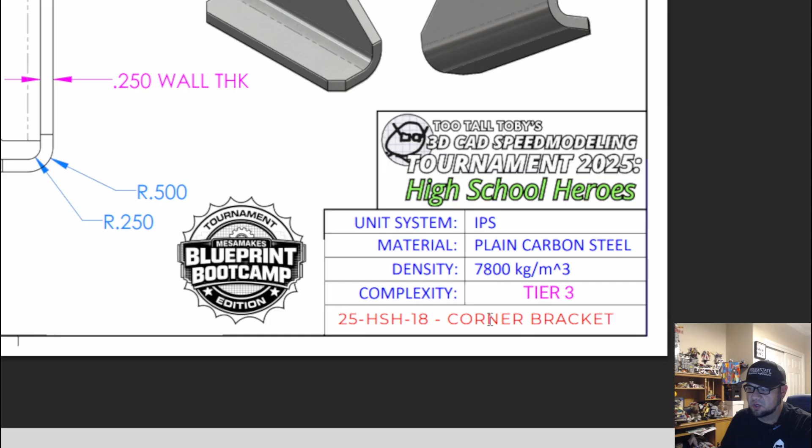So if we take a look here, here is our drawing that we will be doing today. Our units are going to be inches, pounds, and seconds. It is a corner bracket like we've had before, but this time it is going to be a sheet metal bracket. You can draw this whole thing without using a sheet metal function. So if you're doing this in maybe Tinkercad or some other type of 3D CAD system that doesn't have a sheet metal function, it's still possible. You just have to know how to do some stuff. So we'll talk about a little bit of that today.

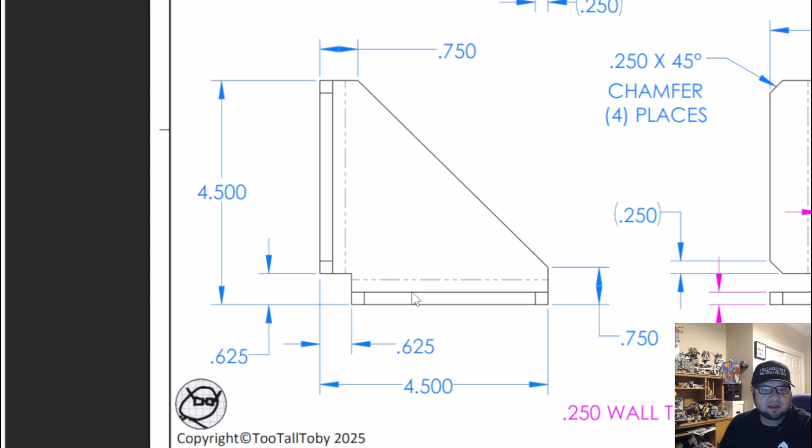But basically, this is the general shape, 4.5 by 4.5, and we're going to come up and over. We've got to cut out a 0.625 by 0.625 square out of the corner for a relief, so when we have those bends they don't interfere. Our thickness is going to be 0.25 or 1/4 inch all the way around, and we have these little legs come off our flanges at 1.25.

So I'm going to walk you through how to do this. And it's going to be a little slower than most of our drawings because I am going to be introducing that sheet metal piece. Like it says, today: what is the mass of this part in x.xxx pounds with a tolerance of 0.001 pound? So let's switch over to our drawing and we will get started.

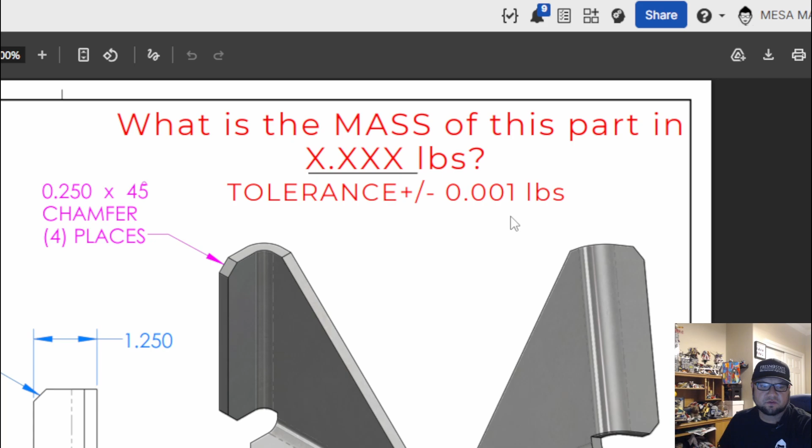All right, once we are in Onshape, the first thing we're going to want to do is start a sketch. So we'll start on that front plane, doing Shift and S to start our sketch and normalize, and P to hide our planes. And this time we're going to start with a little bit of a cutout. So I'm going to use the corner rectangle by pressing the letter G. I'm going to select my origin and I'm going to press the letter Q. Go ahead and zoom in so you can see that a little bit better.

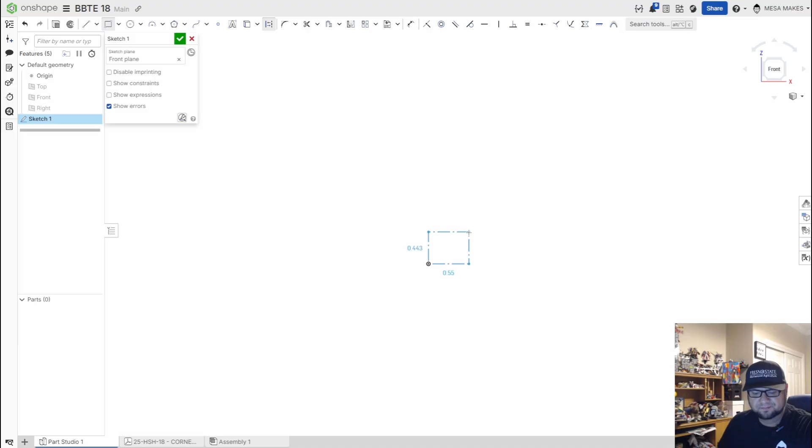And this time I'm going to do 0.625, enter 0.625. And the reason we press that letter Q is because this is a construction line. So we're just helping ourselves out. Next thing, because again we're doing this for speed, I want to do this with just a line instead of using a rectangle, because I'm going to be able to do my dimensions as I go. So I'm going to start here, go over.

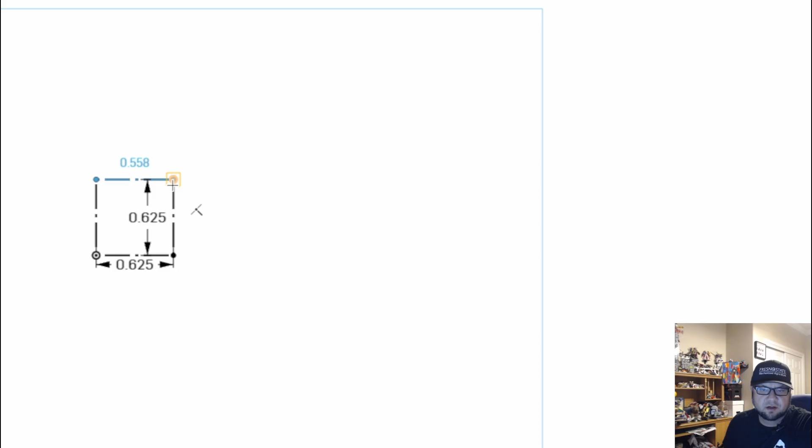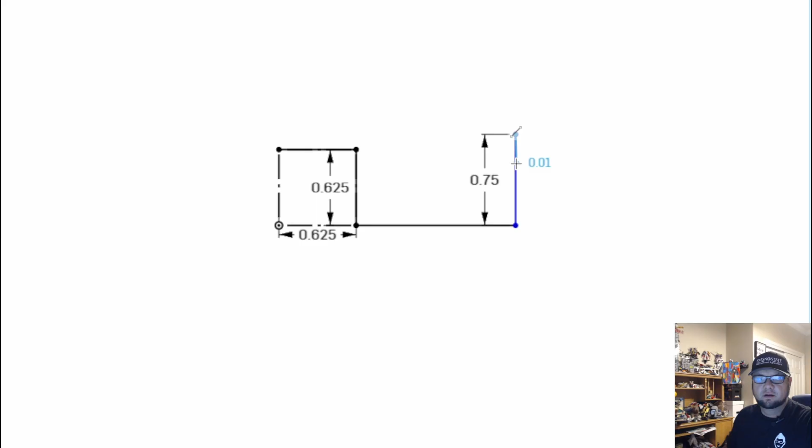I'm going to do that real quick. So I'm going to shut off my construction lines. We'll do letter L. We'll draw a line over, draw a line down. We'll draw a line over. We'll go up 0.75. I'm going to go over here. We'll line up with this end like so,

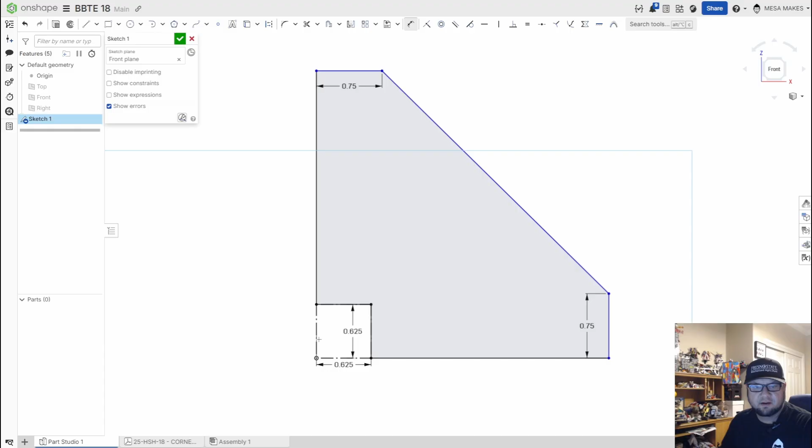0.75. Then I'm going to come back down here and select both of these lines and say equal. It's going to help us out a little bit. We'll zoom back out. And we have our general shape. And now all I have to do is go from my origin to my end and say 4.5, and I get my overall shape.

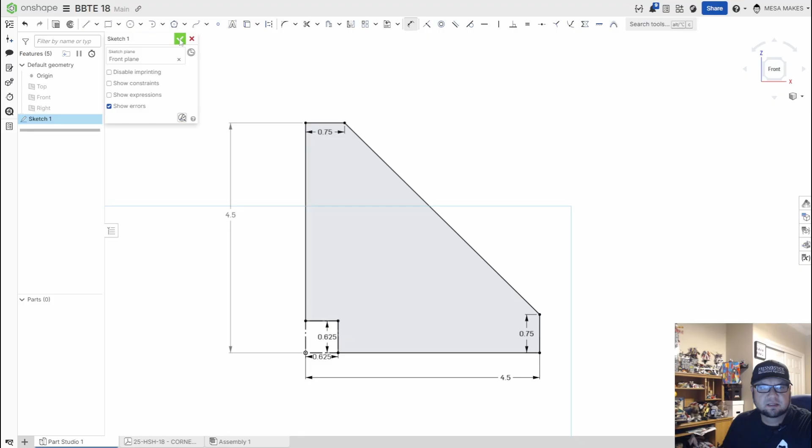So I can check one more time from my origin to here, and we already have that. And notice it is a driven dimension while we have our driving down here. So that's the shape I need to draw. I could have done it with a rectangle and then cut the corner, but this was a little easier for me to visualize and draw. So we're going to go ahead and accept the sketch by clicking the green check mark.

And now we're going to follow up here to the top. We are going to do this using the sheet metal model. So you'll have this drop down next to your search tools, your custom features, and then you have your model tools, your sheet metal model. So we're going to start by making it a sheet metal model. We come over here, we get this, and you have convert, extrude, and thicken.

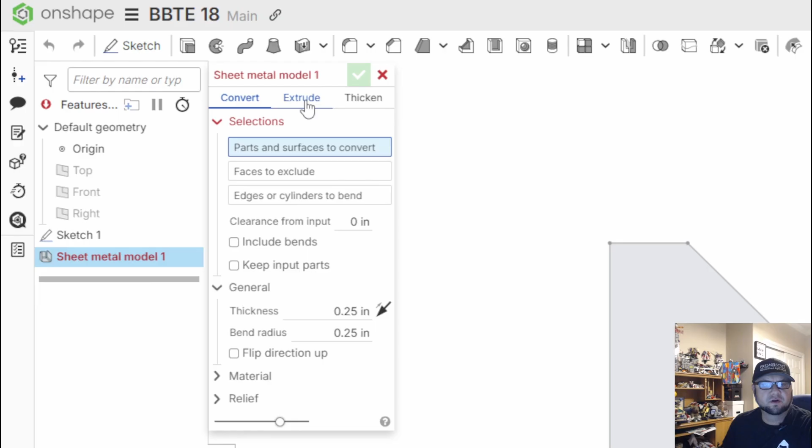Convert takes 3D parts that you already have and turns them into sheet metal models. Extrude is going to take a single line and do that, while thicken is going to take our sketch and make it 3D.

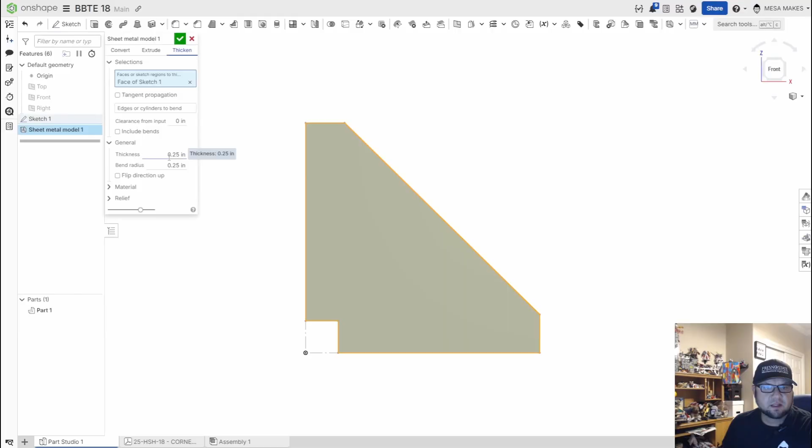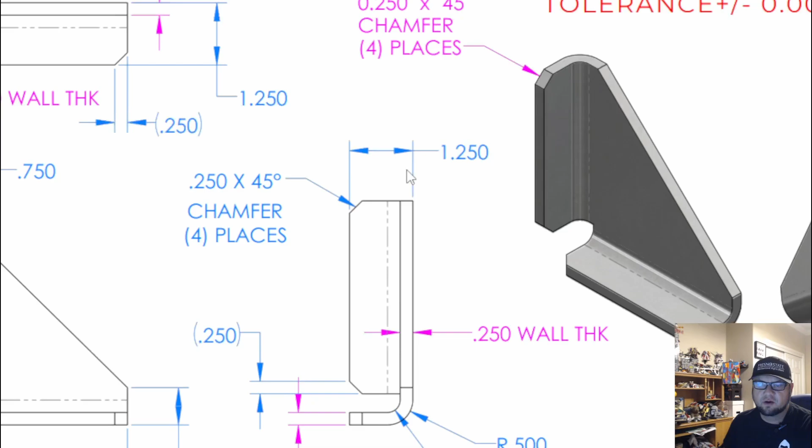So if we look here, we need our thickness on our metal to be 0.25, which I already have in there, and our bend radius needs to match, because if we look back over here, I'm going to jump into our drawing again, you'll see that we have 0.25 of a radius on the inside, and then our outside radius is 0.5. So if you did that simple math, it's going to be 0.25 as our bend radius, which gives us that 0.25 wall thickness all the way through. So if we jump back over into here, we have 0.25, 0.25, and we're going to say accept.

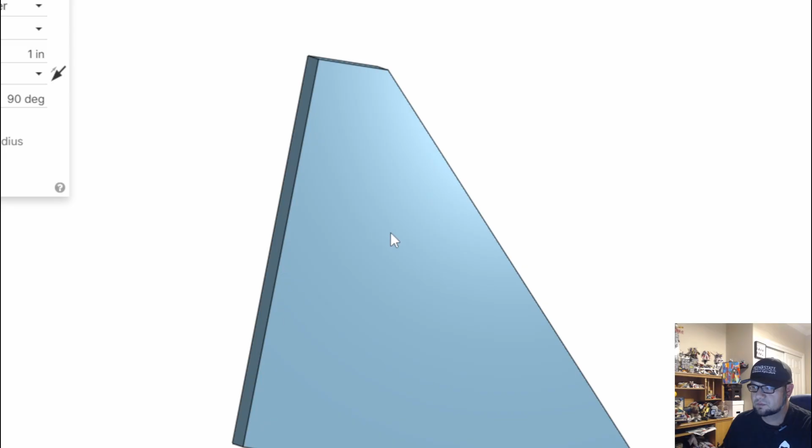And now we have a 3D part, but we need to add those flanges. So our next step is we're going to go again up here to the sheet metal model. We're going to click flange, and we'll get this menu. And this time it's asking us edges or side faces to flange. So the way that works is you kind of zoom in and you pick your edge. So I'm going to pick this bottom corner right here, and I'm going to look at this from the front,

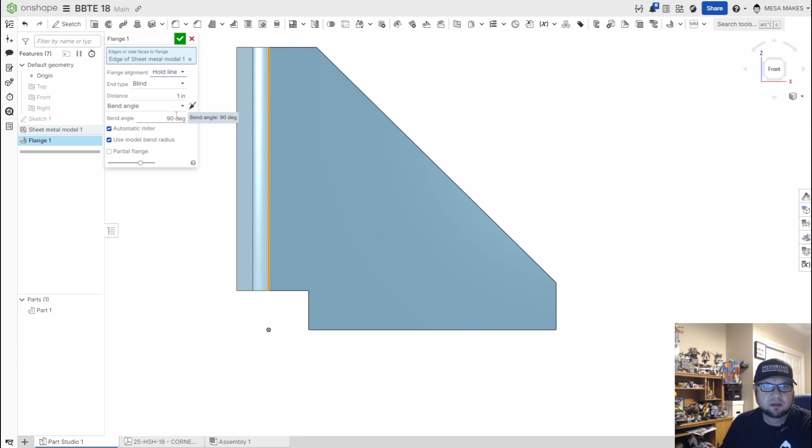and you'll see that when we originally drew this drawing, that line was our outermost. So I got to play with this flange alignment, and if I go inner, it's going to put that line inside of the flange. Outer is going to make that the outside. If we look middle, it's going to center it, and hold line is going to put the bend to the outside of that, which is going to be way bigger than we need. So what we need is outer, to where that line is the outermost part of our flange,

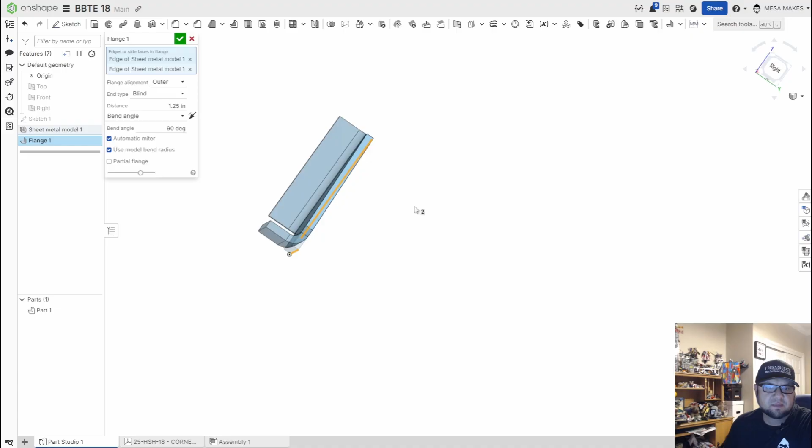and our distance needs to be 1.25. Now the benefit of doing this in the sheet metal view is if I click back up here, I can actually do both flanges at the same time, because they are the same thickness, same depth. If one was a different thickness, then I would have to do a separate flange, but because they're the same thickness, this is kind of cool. We can do them both at the same time. So we're going to say okay, and we have our overall shape.

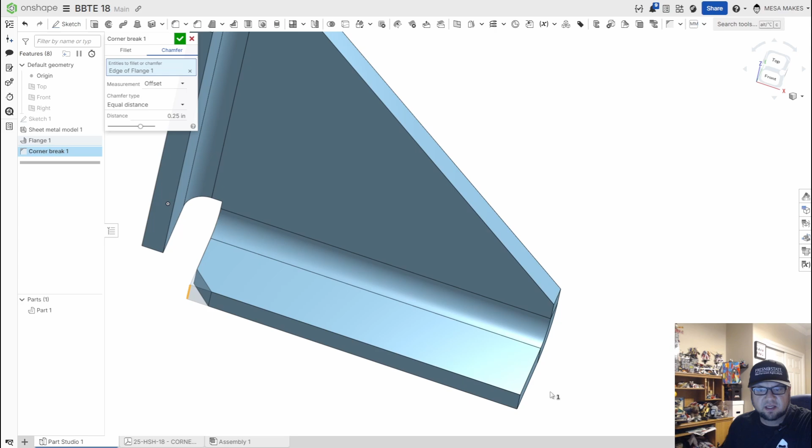Now our next step is we need to add these chamfers. We need to cut these corners. Now you can use this chamfer tool. However, in the sheet metal model, there is corner break, and with corner break you have fillet or chamfer. And what's really cool is you can real quick select each one of these like so, and you don't really have to move a whole lot, and you can get a lot going in one specific view.

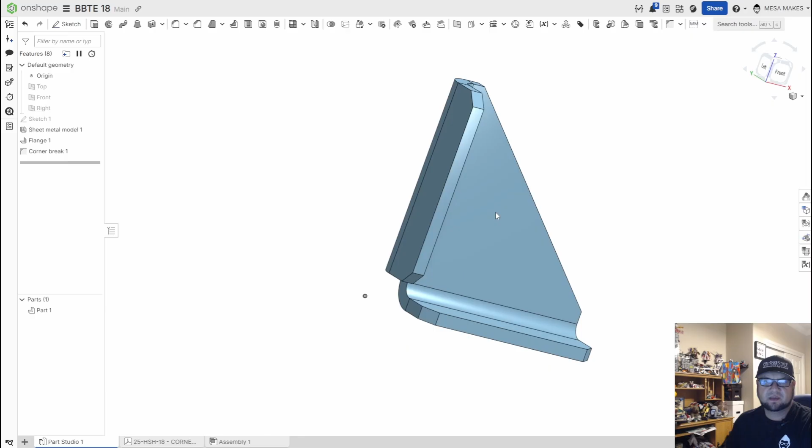So I got all four corners, and if we wanted to do equal distance, two distances, or distance and angle, we'll do distance and angle because that's what it tells us on the drawing. A distance of 0.25 and our angle of 45 degrees. We'll say okay, and we get our shape. So I'm going to right click, assign material, come down here, custom materials. We need to be plain carbon steel.

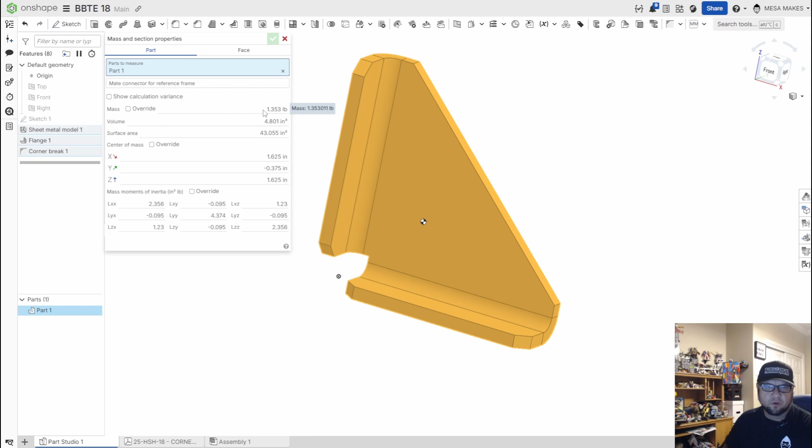We'll say okay. And if I jump on into my weight, I get a mass of 1.353 pounds, which is correct, with a tolerance of plus or minus 0.001. So you can have anywhere from 1.352 all the way up to 1.354 pounds, and that is acceptable. So that's going to be that sketch right there.

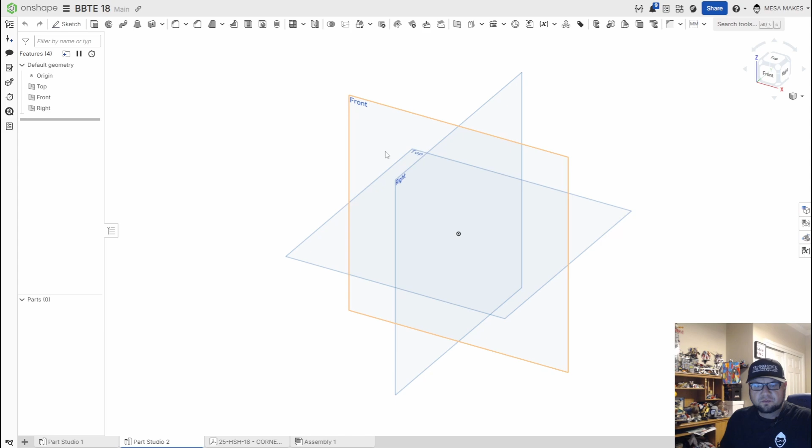Now, I want to show you also how you can do this without using the sheet metal view, because maybe you're still just trying to learn the basics. So I'm going to start a whole new part studio, create a part studio, and we will do this again without any sheet metal tools, the way I kind of learned to start. So we can still start on that front view, shift and S to normalize, P to hide those planes.

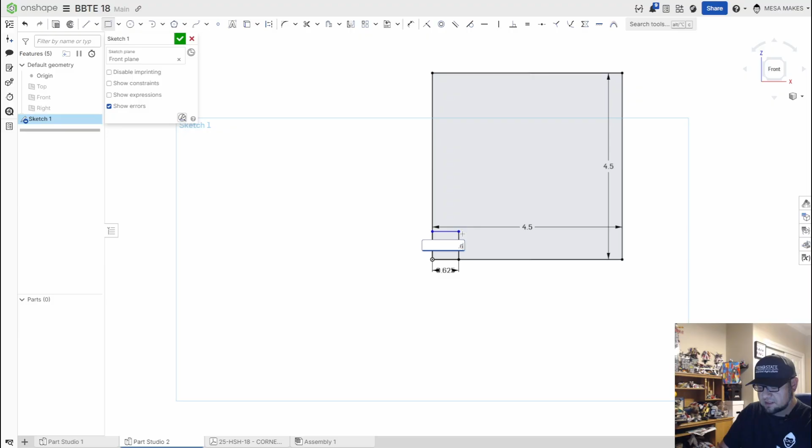And the way I traditionally did this was I started with a rectangle, corner rectangle, and I went 4.5 by 4.5. Then I came in with another one, 0.625 by 0.625 in that corner. I was then able to come and trim that out. I took a line, drew it across, trimmed those out.

And to save myself time, I'm going to select both these lines and say they need to equal one another. So I only have to dimension one of them to 0.75, and it will pull in. Now, just to prove it, we have 0.75 up there as well, and we are good to go. So there's our overall shape. Okay.

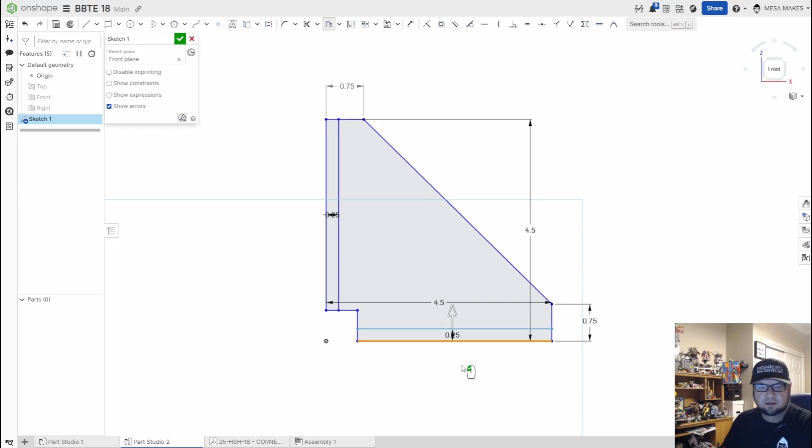Now what we're going to need to do is we're going to offset this line by 0.25, and luckily that's our default. I'm going to offset this by 0.25, and now I can extrude. So what I'm going to do is our thickness needs to be 0.25, so I'll say 0.25, enter, but this time I want it underneath my shape. We'll say accept, turn my sketch back on.

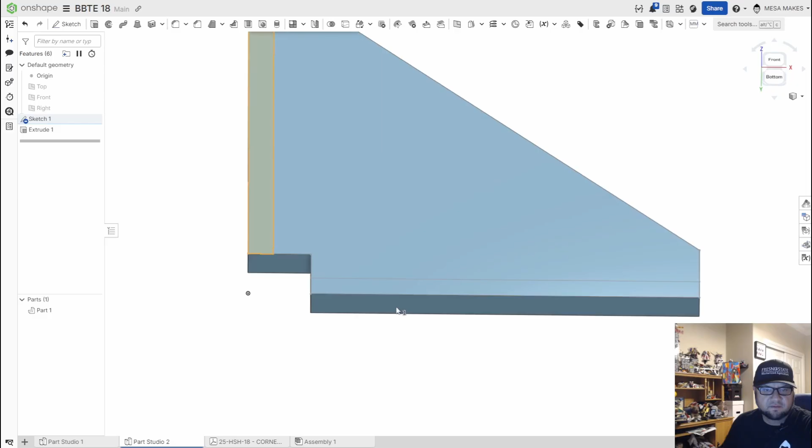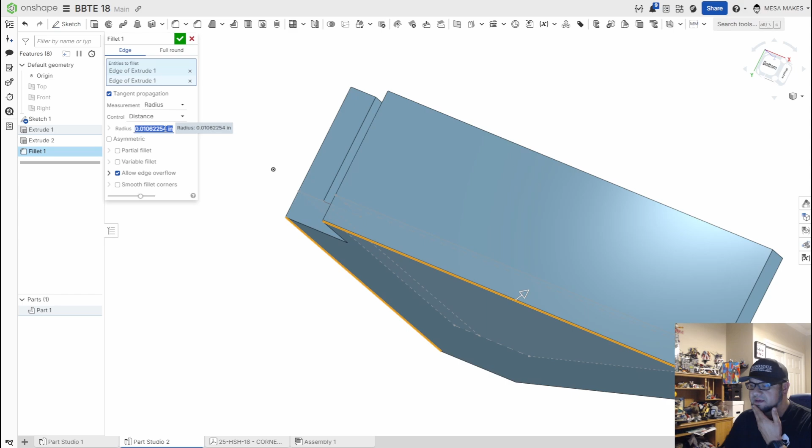I'm going to select both of these pieces, extrude that up, and overall it needs to be 1.25, so we can leave that as 1. And now I have my shape here. Next thing I need to do is round my corners. So if I'm going to do a fillet, I'm going to click here and here, and that radius needs to be 0.5 on the outside.

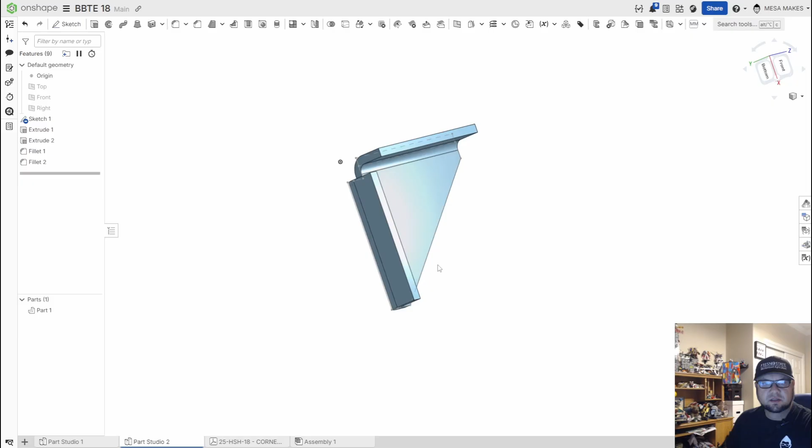And I do it again on the inside, not that one, on the inside, and that one needs to be 0.25. We'll say okay. So now I have my piece done like so. Last but not least, we need to do our chamfer. So I could come over, and again, I'm going to chamfer that corner. Move this a little bit, there we go. That corner, and that corner. And that needs to be 0.25, 45 degrees.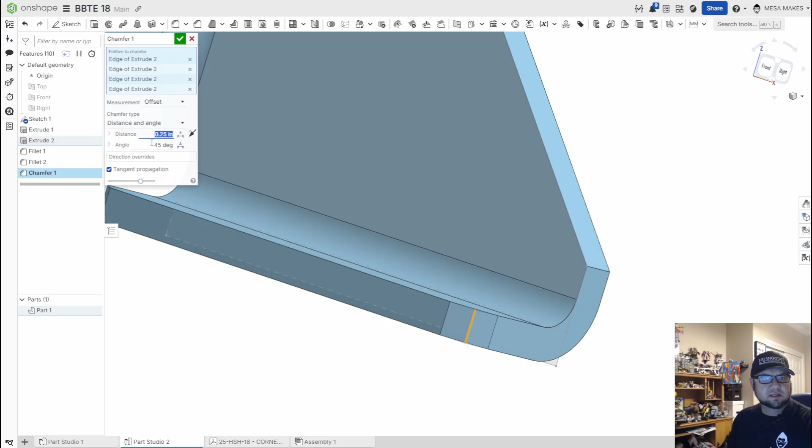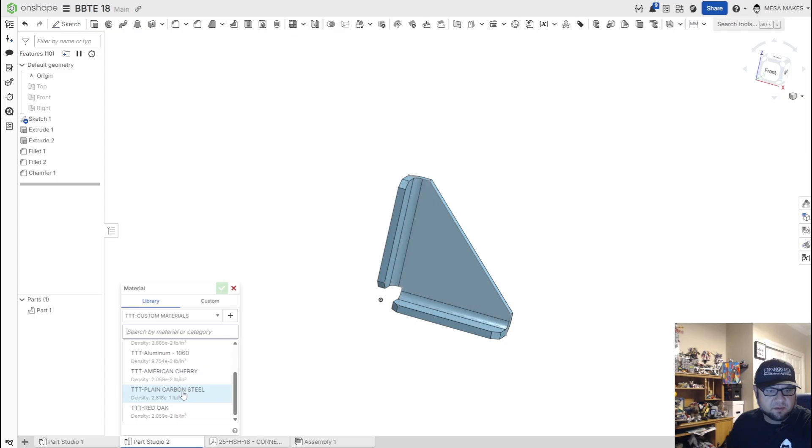We'll say okay, and we have our piece. So we are still the same. We'll check our mass. I'm going to apply, select, apply. Come on. There we go. Assign material. Our material needs to be the plain carbon steel. Say okay, and we'll measure our part. And again, I get 1.353, which is the same answer.

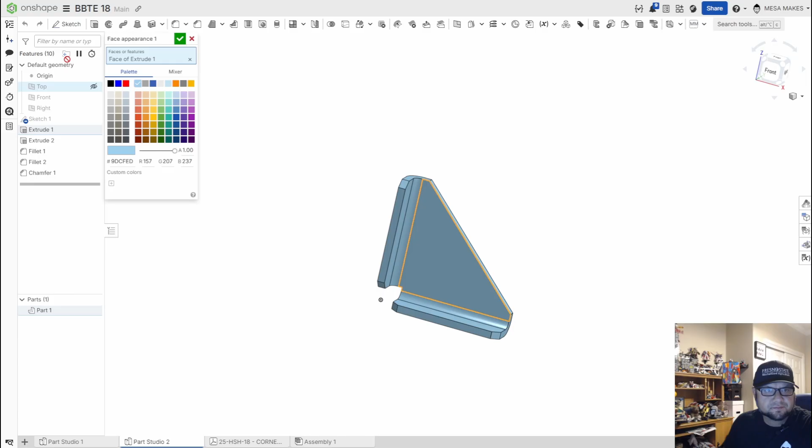So another cool thing you can do is if you bring both over into assemblies. Actually, let me change this one really quick. Change the color. Let's make this thing, not appearance, add the whole appearance. Let's make this one like an orange color. Come into assembly. I can insert both part 1 from Part Studio 1,

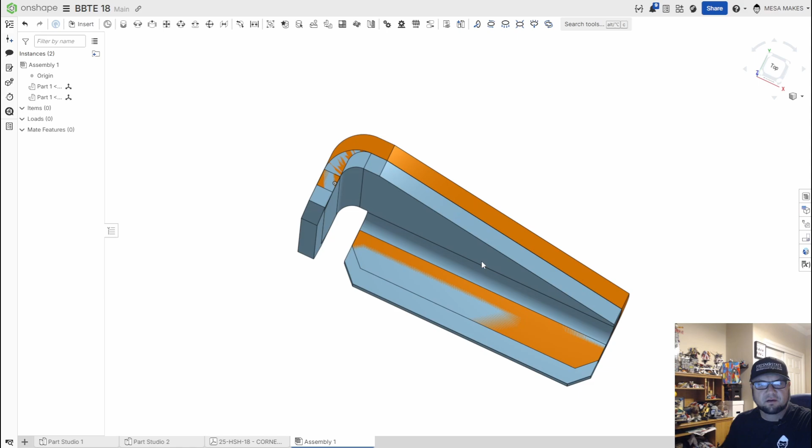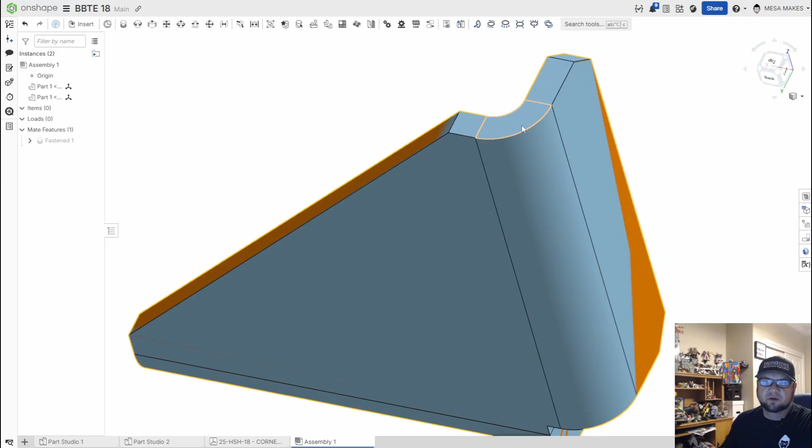and you'll see the reason we're off a little bit is because of the location of one model versus the other. One was using the origin in a slightly different way. So the way we'll show this is we'll do like a fastened mate, and we'll take that piece and that piece, we'll throw those together in the same spot, and you'll see the reason we get that zebra kind of look to it is because it's trying to render both models at the same time, but they exist in the same spot.

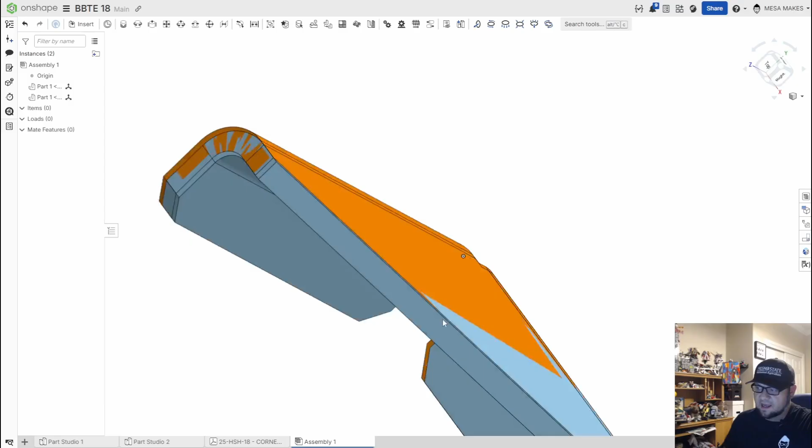Now, just to kind of show you how I would know it was off, you're like, well, how do you know the difference? I'm going to pick one and just slide it just a hair. So anywhere where it's kind of rough like that, they exist in the same spot. Well, since I slid that one over, this looks clean by itself, this one part, right? So anywhere it's giving you kind of that crazy, psychedelic looking tie-dye look, they exist in the same location. Anywhere where it's solid, it's off on its own.

So if I undo that movement, you'll see the whole thing is tripping out and showing me different views, but it is the same model all the way throughout. So that's going to do it for us today.